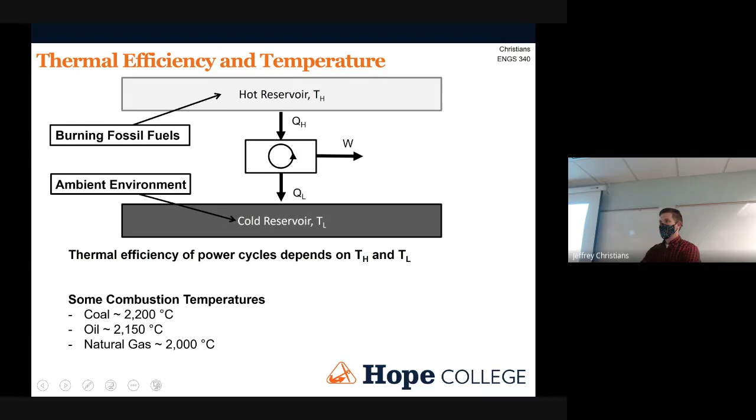When we looked at some of the practical aspects of a power cycle, like the steam cycle, we said, well, okay, so what do we know from the stuff that we've done? A higher high temperature and a lower low temperature are better. So we want to ideally get the highest high temperature that we can and the lowest low temperature that we can. So we design different things like cooling towers, or we put our power plant by a lake or a river, or Lake Michigan, something like that, to get our low temperature consistently low.

But we can't go below ambient temperatures, whatever that happens to be. And then for the high temperature, we're limited in steam power plants—limited by the practical aspects of a steam plant, in that you're making really high temperature and really high pressure things, and that's just inherently dangerous. So we're limited by kind of materials aspects and just the inherent danger of continuing to raise temperature and pressure.

But we still have a lot of temperature to play with, and that's where the Brayton cycle comes in. It's the standard air cycle for power generation, the natural gas power plant cycle. It allows us to start to access higher temperatures. Like natural gas, the combustion temperature is 2,000 degrees. We want to get up closer to that, out of this 500 to 600 degree C range, and bump up over 1,000, 1,500 type degrees. Raise that high temperature as much as we can.

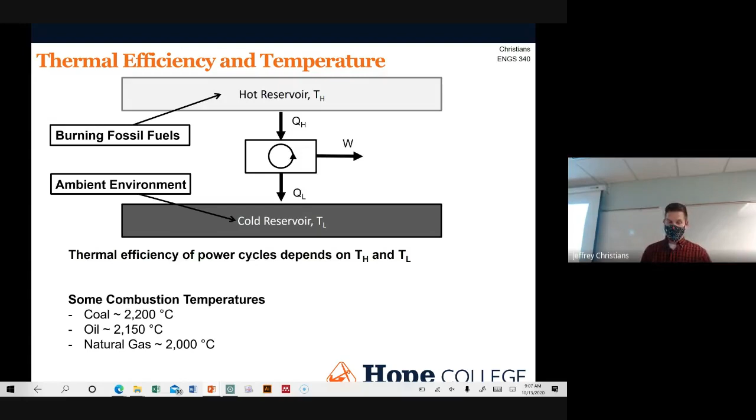So what that means is we can take a system like this - instead of just a natural gas power plant running just a Brayton cycle, we're going to combine the Brayton cycle with a steam power plant cycle, with a Rankine-like cycle. We're going to combine these two so that we can use the really high temperatures, but we can also use the medium temperatures.

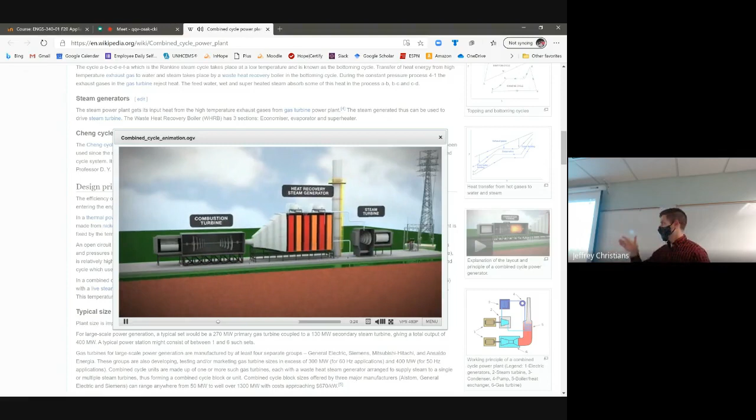I showed this last week, where modern natural gas power plants have a setup at least generally like this. This is what the Holland power plant looks like, where all the way on the left is the combustion turbine. It's really a compressor, combustion chamber, and turbine all in one. Then you have a boiler - that's the really tall structure they call the heat recovery steam generator. That's simply the boiler.

That combustion turbine is generating electricity. The waste heat from that turbine goes as the heat source, QH, for the boiler, for a second system running a Rankine cycle. So it's a way to be able to use a broader range of temperatures in our system.

It boosts our practical efficiency. In practical terms, a Rankine cycle by itself, we're stuck at about 40% thermal efficiency. A combustion turbine by itself, we're also stuck at about 40% efficiency. If we put these two together into a combined cycle like this, we can get up to about 60%, actually a little above 60%. So practically, for the same amount of fuel, we get 50% more energy.

So it's a huge bonus - 50% more energy for essentially free. I mean, you have to build extra stuff and there's some costs with that, but essentially we get 50% more electricity for no extra fuel costs.

That's why if you're building a natural gas plant, you're going to be building a combined cycle plant. The only places that systems are built that are not combined cycle plants are for what they call peaking power plants. The power demand over time goes up and down - as people come home, everybody turns on lights and washing machines and dishwashers and air conditioners, and power demand goes up. So to meet some of those spikes, sometimes they'll have just a system that operates just for that - sometimes they're called peaking plants.

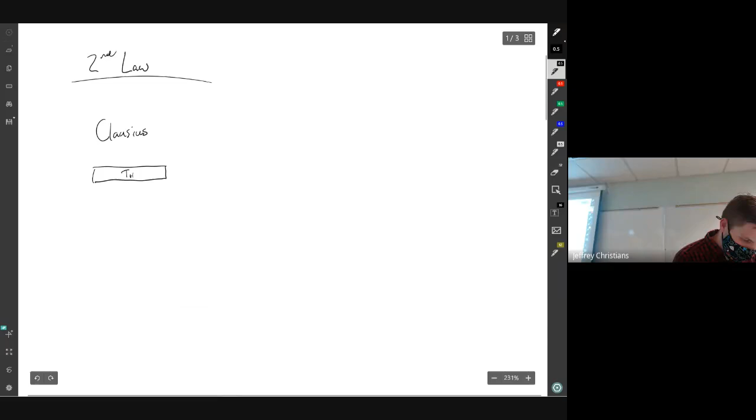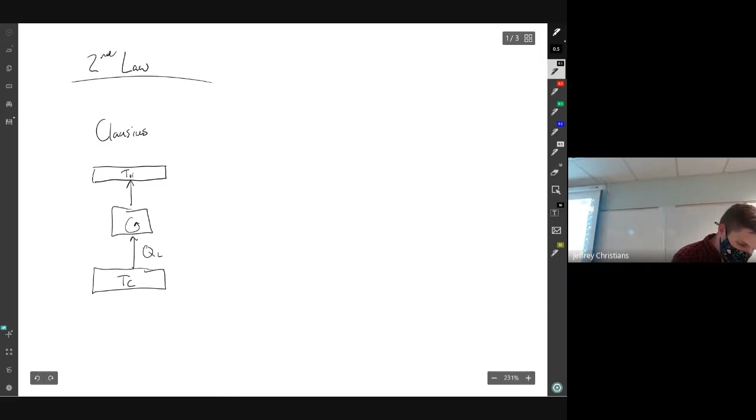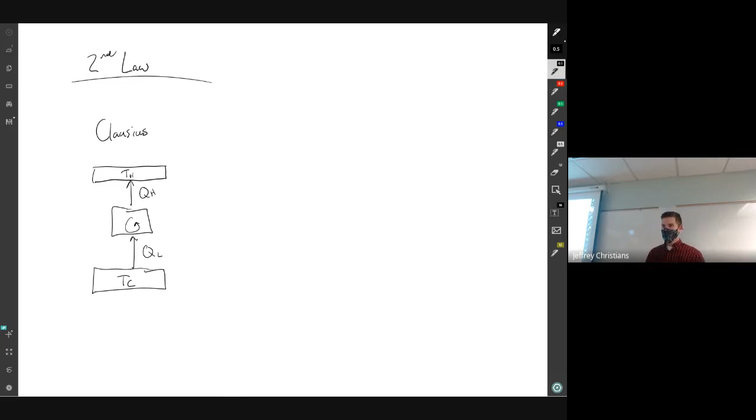This is QL, QH. We said Clausius said that we can't take heat and move it from a cold temperature up to a high temperature without any work input. And the other statement of the second law that we had was Kelvin Planck.

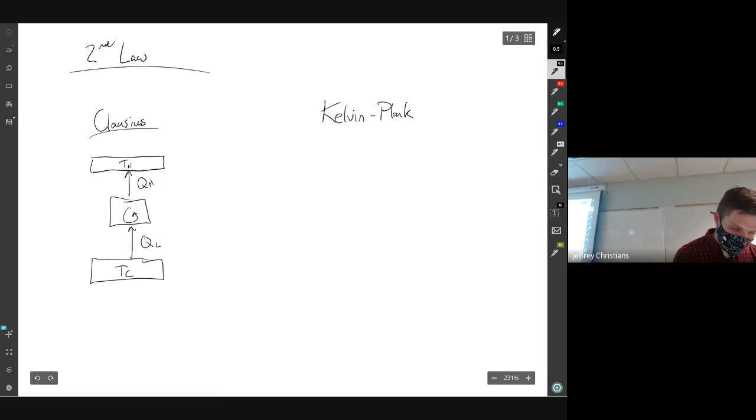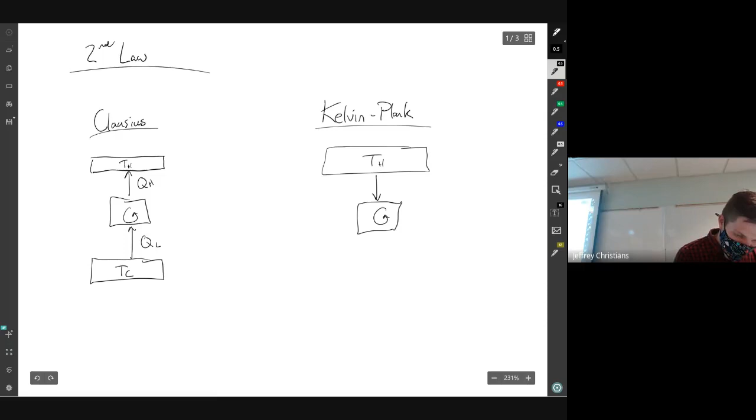Kelvin Planck said kind of the opposite. Kelvin Planck said that we couldn't take heat from some high temperature reservoir and turn it perfectly into work. So the 2 kind of tweaks that we could make on that was...

I'm going to draw this here in blue. So these are the 2 different statements of the second law, Kelvin Planck and Clausius. What we said is we could do something like this, where we added work into a system, and then using that work, we moved heat from a cold temperature to a high temperature. And for Kelvin Planck, we could take heat, convert some of it to work, and then lose or waste the rest.

TL. So what I've drawn in blue now are the 2 cycles that we can actually do. In black are the 2 different statements of the second law. Now in blue, that's what we can do. We've focused so far only on the right-hand side, taking heat, turning it into work.

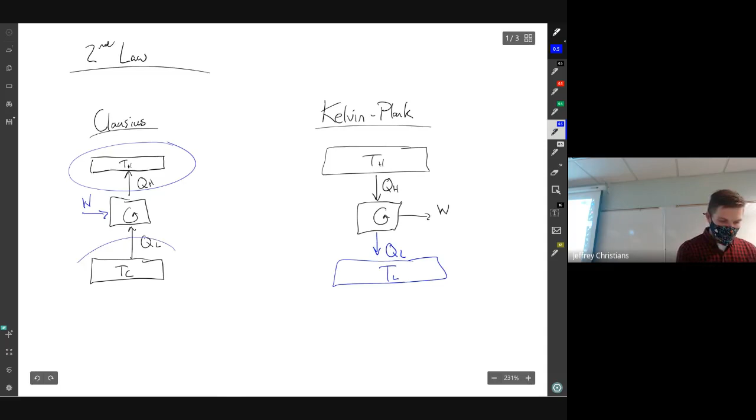That's what's happening right up here at the top. That's outside. And down here at the bottom, that would be the inside of your house.

What's kind of cool about it is, for Kelvin Planck, we said, what's in that black box? And that's what we focused a lot on. What is in that black box? The ideal thing on the right-hand side in that black box is what? What's the best black box we could have? Carnot, the Carnot cycle. So what's the best black box we can have on the left-hand side, which is the same thing but going the other direction? Everything's going the other direction. Take the Carnot and reverse it. Draw the arrows the other way. So that's exactly what we're going to do on the left-hand side.

And we can make a reverse Carnot called the Carnot refrigeration cycle. It's literally taking the Carnot cycle and flipping all of our arrows the other way. What was once a pump now becomes a turbine. What was once a turbine now becomes a pump. Everything just flips and reverses and does the opposite of what it was doing before. So what was once the condenser now becomes a boiler, and what was once the boiler now becomes a condenser. Everything flips roles.

And when we flip roles like that, we get to an ideal refrigeration cycle. What do you think might be a problem with it? All of the same things that were problems with the ideal power generation cycle. So like the Rankine cycle, we can make practical concessions. It's not easy to design a compressor that deals with vapor or liquid mixtures. Same thing for the refrigeration cycle. So we're going to do the same kinds of things and ask, practically, what can we actually do?

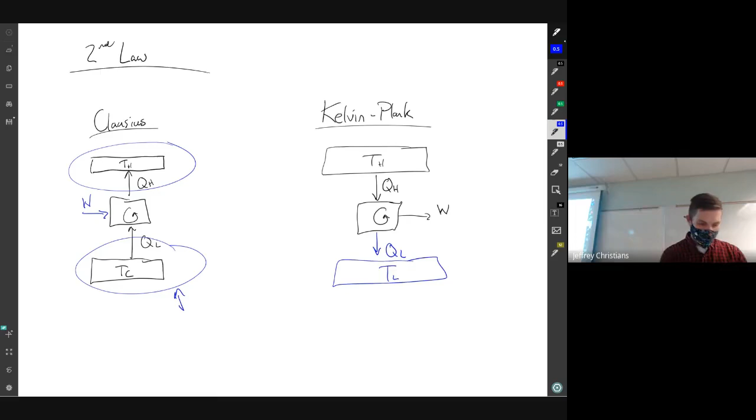In an AC unit, that cold temperature is your house and the warm temperature is outside. In a heat pump, you do the exact same thing, but now the warm temperature is your house and the cold temperature is outside. So it's a way to flip an AC unit and turn it into a place where you're dumping heat into your house.

The reason you would do that versus a furnace or an electric heater is you actually get more bang for your buck. You're not creating heat. Like an electric heater, you're taking electricity and converting it to heat. In a refrigeration unit, you're not creating heat, you're moving it from one place to another. So you can actually move heat easier than you can create it.

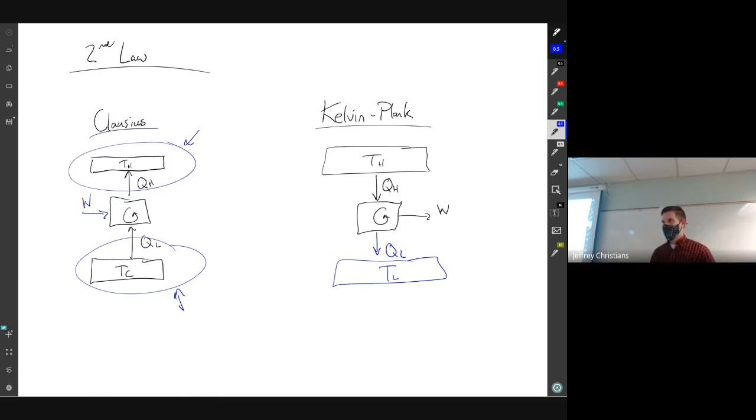So heat pumps, refrigeration cycles, they're not 100% efficient — they can be 200 or 300% efficient, or even more. So you get a whole bunch of extra heat for the amount of work you're putting in. We'll go through and do some analysis of that in the videos and also on the homework.

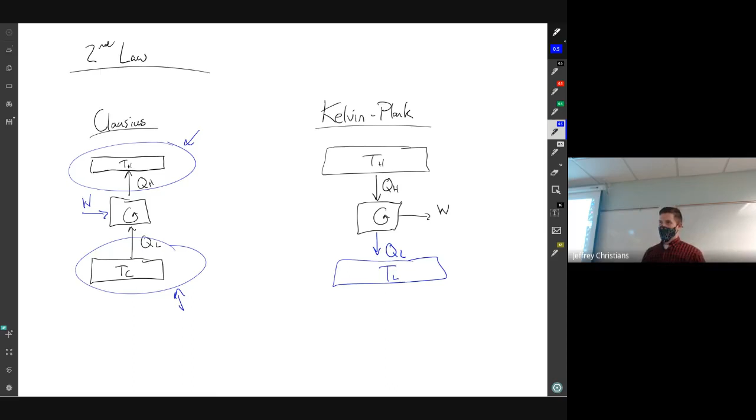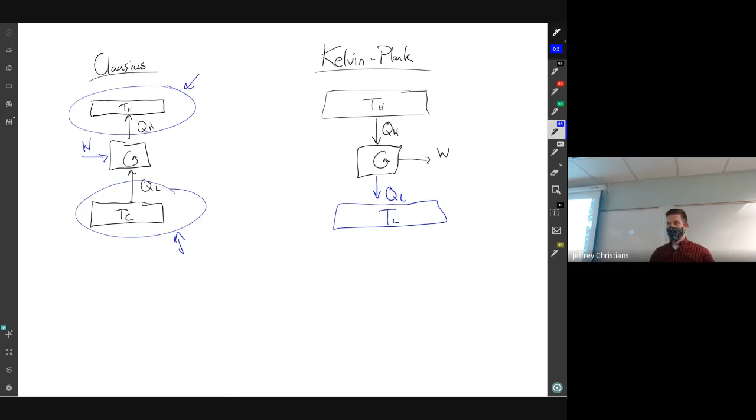But what we're going to spend the rest of today looking at is neither of those. We're going to again start transitioning to a little bit more theory, but hopefully stay connected to real tangible things. And we're going to do that by switching the types of systems we're looking at. So far, we have looked exclusively at systems that are control volumes.

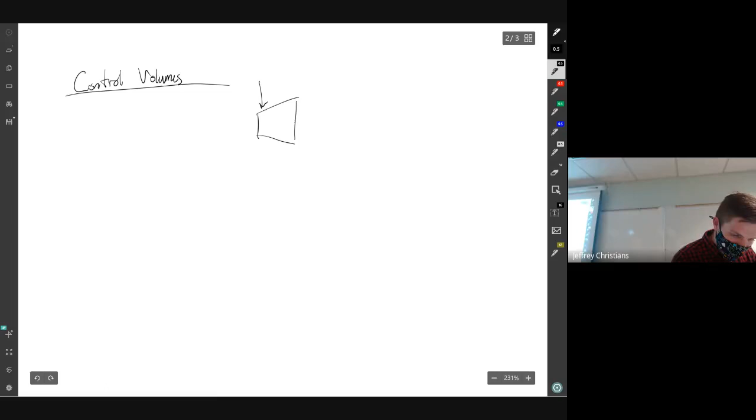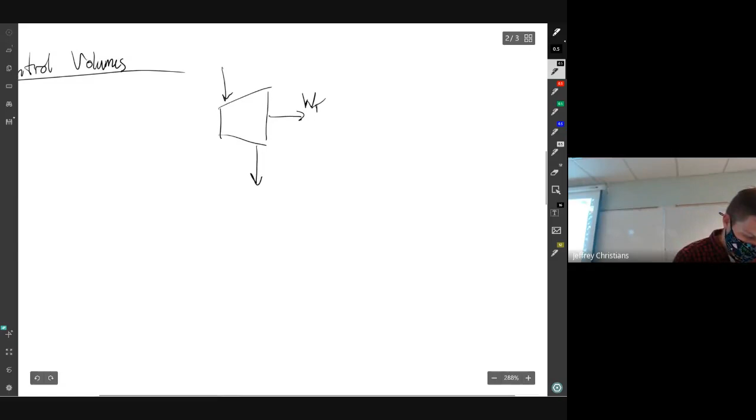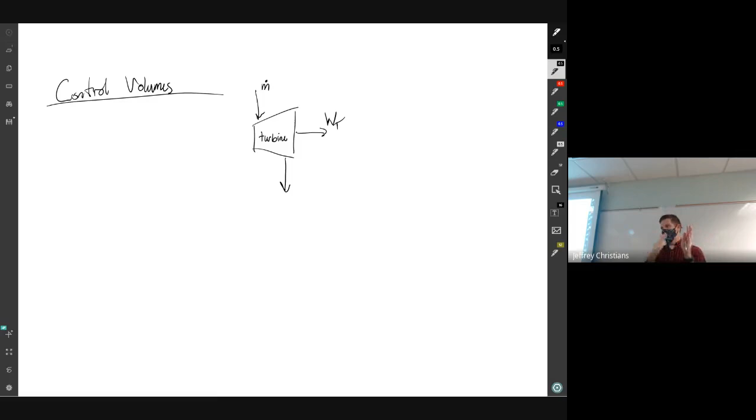What I mean by that, I'll just draw one. We have a system like this, we're getting work out — so this would be a turbine. And we're looking at a mass flow rate through that thing. If we think about how we're doing the analysis, functionally we're taking a look at that specific region of space and saying what comes in and what is leaving. So in a system like this, work is generated, or extracted, or supplied, by an external device.

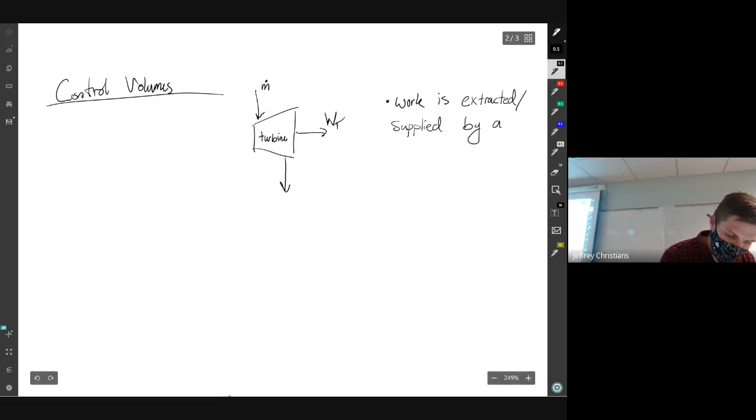Right, external device - a pump, a turbine, a compressor, one of these things we've been looking at before. These are commonly used all over the place. In real systems, we have pumps, compressors, and turbines. But it's helpful, especially if we want to understand a little bit more fundamentally what some of these different thermodynamic quantities are and where they come from.

It's useful to shift our perspective a little bit. Instead of looking at a specific region of space, we can follow a set amount of stuff, and watch what happens to this specific mass. We do that using a control mass - instead of viewing a region of space where things come in and go out, now we view a specific amount of stuff and look at changes that happen to that quantity. The big difference is it allows us to understand a little bit better what some of these quantities are.

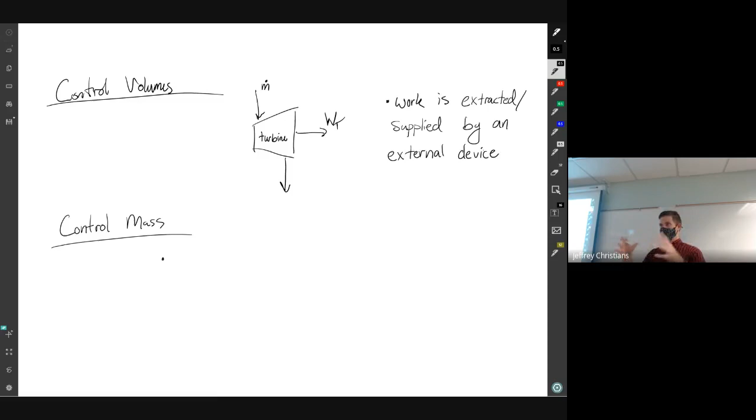The big difference is that work becomes - in a control volume, work was happening because of some moving mechanical part. It's kind of the same, but now it's not a moving system - the whole mass is either expanding or contracting. In a control mass, we're looking at a set amount of stuff, so if the pressure goes down, the whole thing expands. Volume can change - we're not looking at a set region, we're looking at a set quantity, so it can expand and contract, and that's where work is done.

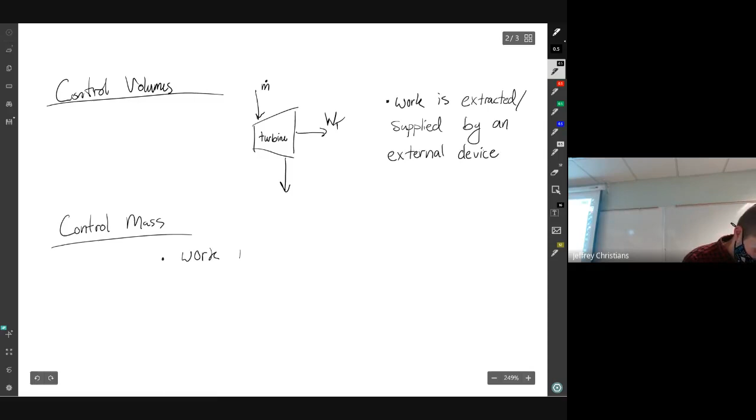So work is done by the system - and by system, I mean this control mass, this thing that we're looking at - by the system pushing against the surroundings.

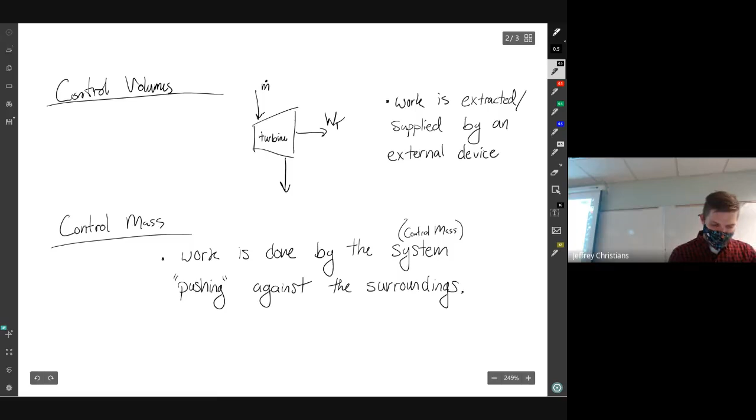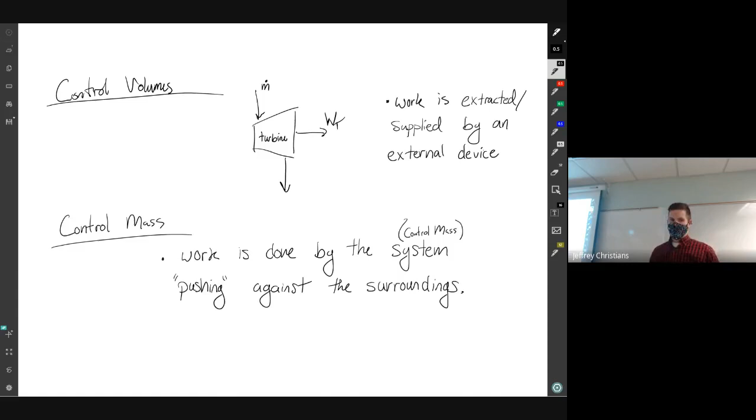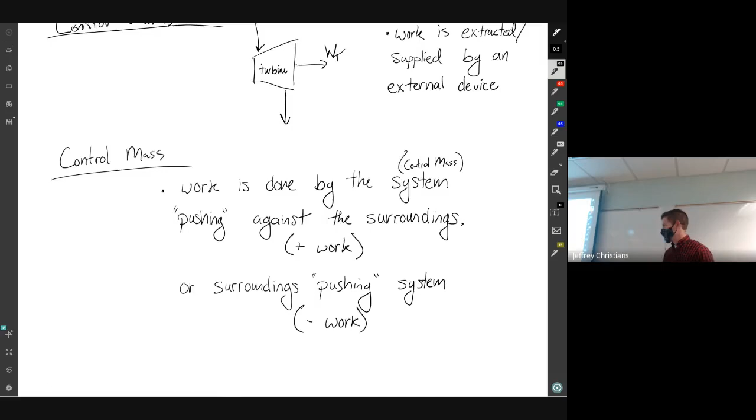Or we could flip that and say the surroundings can push against the system. So this is how we're going to define it. How did we define positive and negative work before? We defined it kind of by a steam engine. If we put heat in, that was positive heat. If we take heat out, that's negative heat. If we put work in, that was negative work. If we take work out, that's positive work. So if the system is pushing against the surroundings, that would be positive work. Or the surroundings pushing on our system, that would be negative work.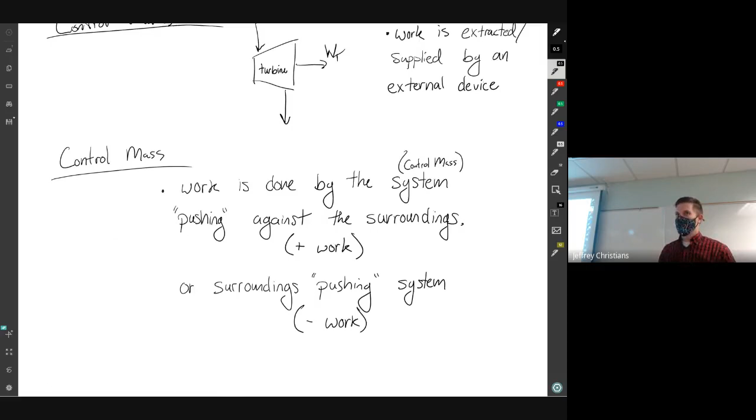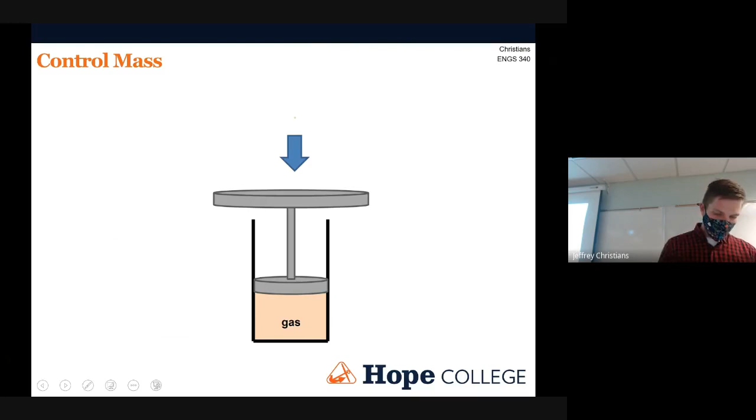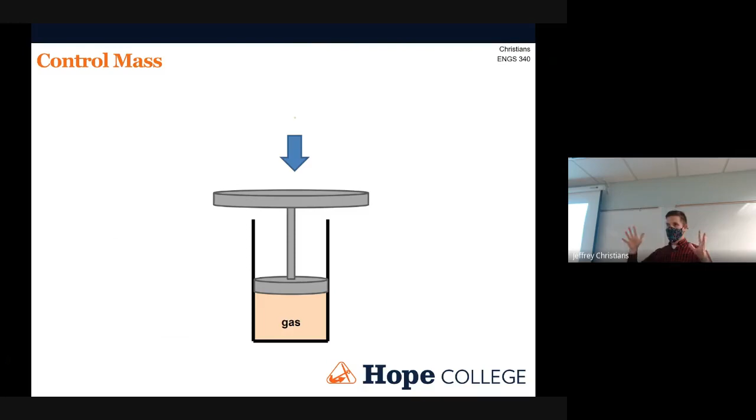So we have the same definition, but it feels a little bit different - where if we're pushing against the surroundings, that's positive, that's getting work out. If we're pushing on the system, we're putting work into the system, that would be negative. You may remember from quite some time ago when we first talked about reversible processes, I showed something like this - what was a reversible compression? It was a compression that happened as gradually as possible, where our system stays in equilibrium the entire time. We're adding a single grain of sand on top of our piston, grain by grain, and slowly that's compressing our gas.

This is a control mass problem, so we're looking specifically at the gas in that cylinder. Oh, didn't mean to do that - I think I must have pushed a button on my pen. All right, are we back? We're not back yet.

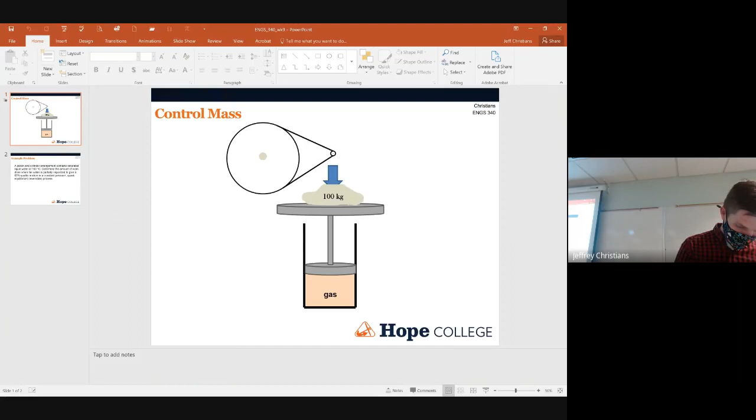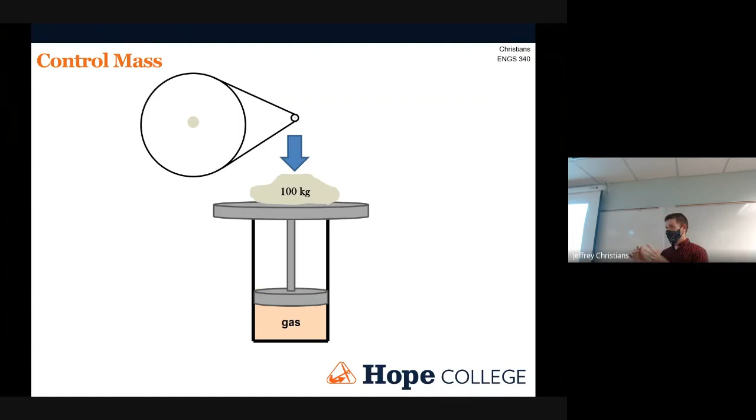All right, so this is a control mass problem where we're looking at the gas inside of the cylinder. That would be the region of space that we're interested in, and it can change volume as it's expanded or contracted - that's where either work is done on the system, or the system, the gas, does work on the surroundings. You can see this is going to be a piston and cylinder. We're going to do a lot of piston and cylinder problems because it's an easy way to conceptualize what a control mass is - the control mass is the stuff inside the piston and cylinder.

That's certainly not the only way control mass problems are relevant. We're going to use them to look at something like an internal combustion engine - if we want to calculate the power from an internal combustion engine, we can use control masses to do that. But they're useful more broadly than that. We'll use this as a useful way to picture it because it's easy to see what's the mass we're looking at and what's the surroundings. So we'll use piston and cylinder problems quite a lot.

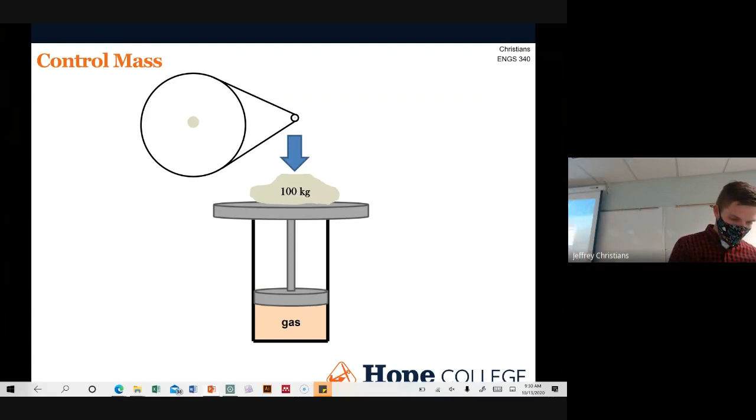Okay, so for this system, this type of control mass, for work to be done - we'll put a star by this.

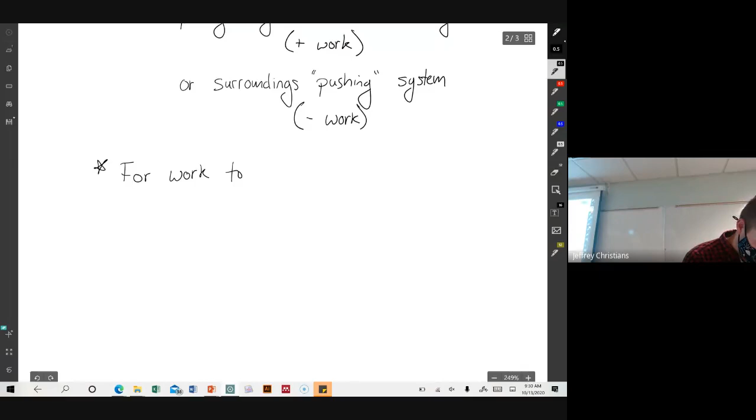For work to happen, either positive or negative work, anything non-zero, there must be a volume change.

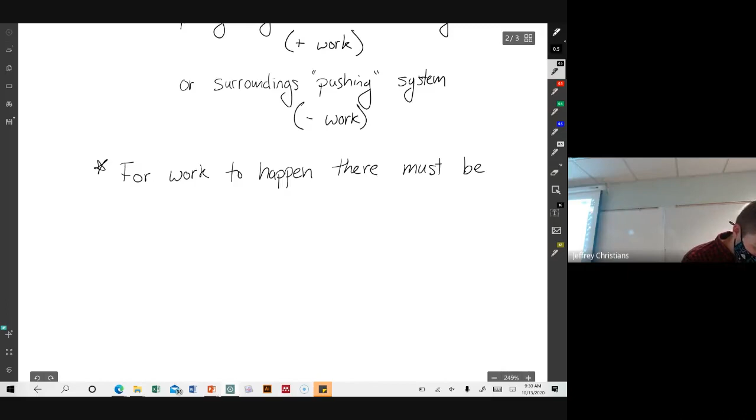So this is one of the key insights from control masses. We have to have a change in the volume of the stuff for there to be any work at all. If there's no expansion, if there's no contraction, there is no work. If it's a constant volume process, work is zero. You can't, there's no pushing. The surroundings are not pushing on the system, the system is not pushing on the surroundings if the volume isn't changing, if there's not an expansion and contraction.

If we think about a more basic definition of work, work is a force applied over a distance. So no volume change means there's no distance. If I push against this, but it doesn't move, I maybe pushed hard, but I didn't actually do any work. So the same thing here. There's no work if there's not a volume change.

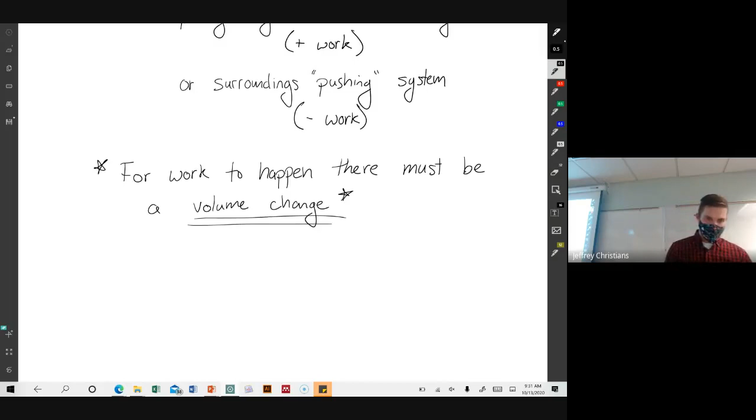Just like in a control volume, we can have different ways that we go about it. I just showed you one where we did a reversible compression, or pretty close to reversible compression, where we added a grain of sand at a time. We could also do, you probably don't remember this, but there was another example. What's an irreversible one where we throw a 100-kilogram barbell on it? And we don't do this one grain of sand at a time. We do it all of a sudden. That would be an irreversible process.

Just like for a control volume thing, we could have a reversible turbine or an irreversible turbine. We can do the same thing with control mass problems. We can have a reversible or irreversible expansion or compression.

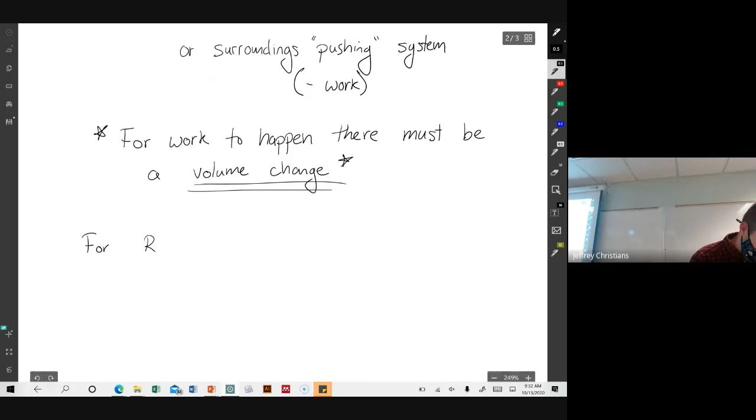For reversible work, we call this typically PV work. This is PV standing for pressure volume work.

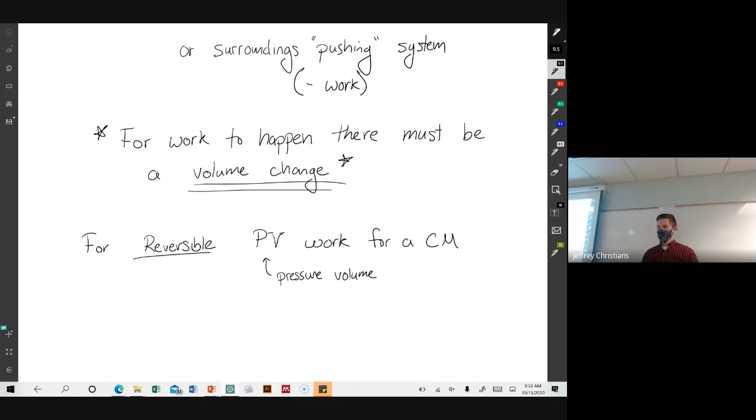So for reversible PV work for a control mass, okay, so for a control volume, we said we could do delta S equals 0, and then we could do energy balances. That still works. We're still going to be able to do the same thing. The other way that we did it, we did this for liquids. We said we can just calculate the work directly from pressure and volume. And we got the integral of V delta P, VdP. So we got for an incompressible liquid where V doesn't change, we had, let me just write this.

Equals minus the integral of VdP. I'm going to put this in brackets so that this is just a note. This isn't, it's going to look kind of like this, but not exactly.

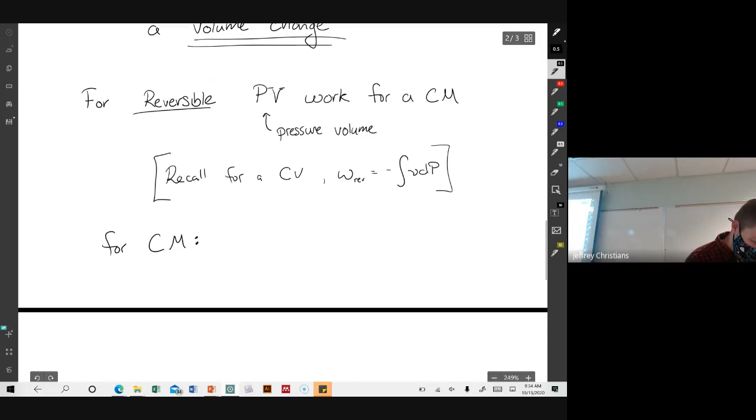For a control mass, the reversible work, and well, I'm going to write it like this. I'm going to put little subscripts 1 and 2, 1 on the left side, 2 on the right side. I'll explain why I did that in a second. It's equal to minus the integral of PdV. I think I screwed up. It shouldn't be minus. It should be just the integral of PdV. So it looks almost the same, but the P and the V are switched.

And that's with reason, but it's really easy to get those two mixed up. The reason that they're switched, we can get into it a little bit, but we'll get into it later. And just trust me now that they're switched and they're supposed to be switched. It's because of enthalpy. Enthalpy screws everything up, right? Because it had this flow work, which was a pressure volume term in it. So that flow work term screws up other stuff.

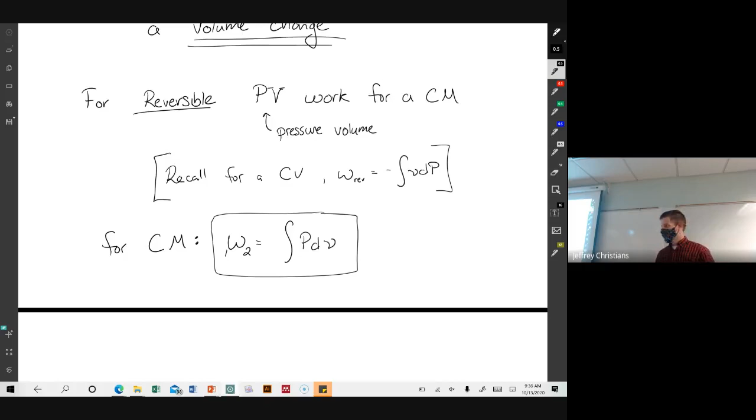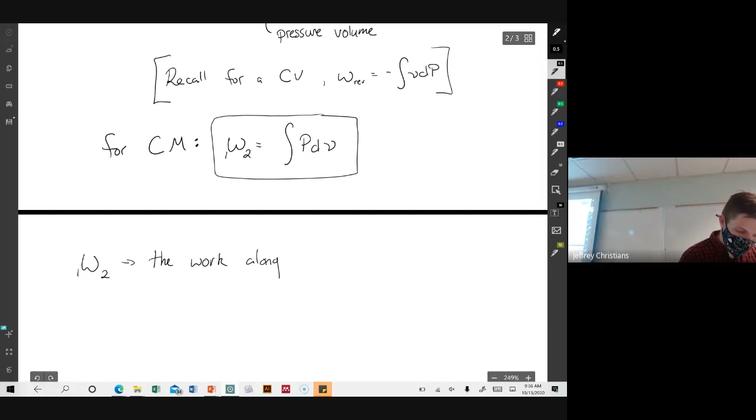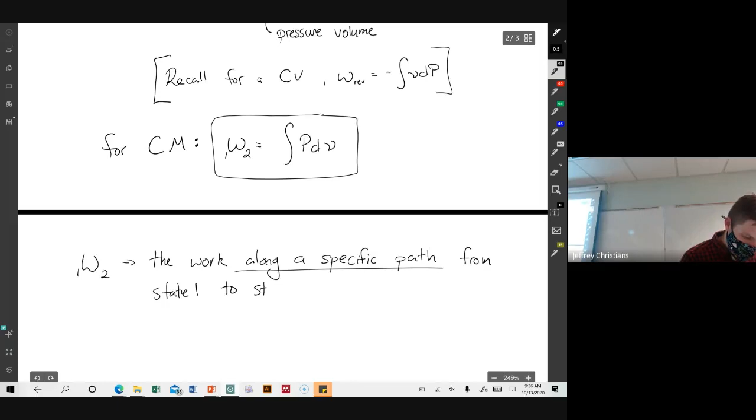So this is a key equation for control mass problems. It's the work for an expansion or contraction. The W12 means the work along a specified path, or a specific path, from state 1 to state 2.

So we're trying to connect this to stuff we've already done and gotten really good at. When we looked at the work of a turbine, we said we're coming in at state 1, the turbine happens, and then we leave at state 2. This is kind of the same thing, except it's not like coming in, something happens, and then we're leaving. It's initially we're here, something happens, and now we're here. So it's not like a space thing with an inlet and outlet.

That's the big difference for a control mass, because we're tracking the same bit of stuff throughout. So we look at where it is initially, what exactly happens, what is that process, and then where we are after that.

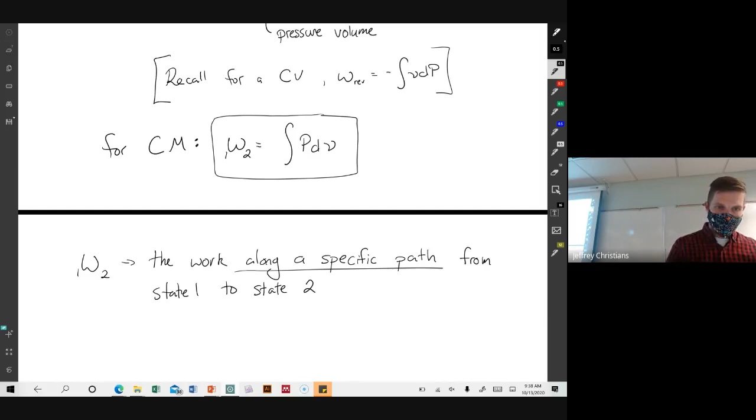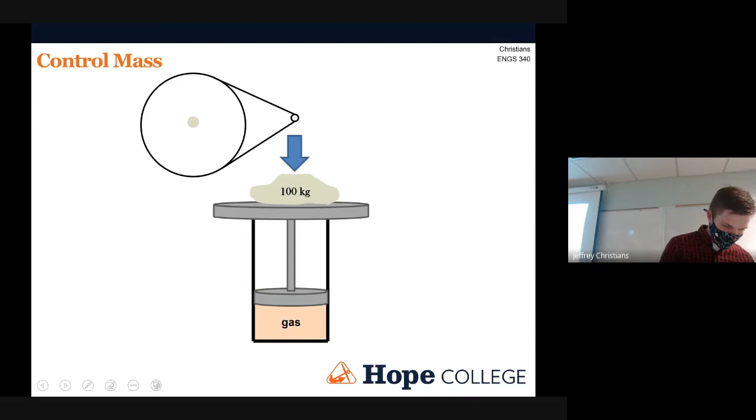Okay, we'll do one quick example. You'll see some similar examples in this week's homework, a couple of them, and once you get the hang of them they're really easy. In this example, we have a piston and a cylinder. We're going to deal with piston cylinder problems quite a bit because it's relatively easy conceptually.

It contains saturated liquid water at 100 Celsius, so it's 100% liquid. Then we have to do work to partially vaporize the system to give a 65% quality mixture. We're told this happens through a constant pressure, quasi-equilibrium, or reversible process.

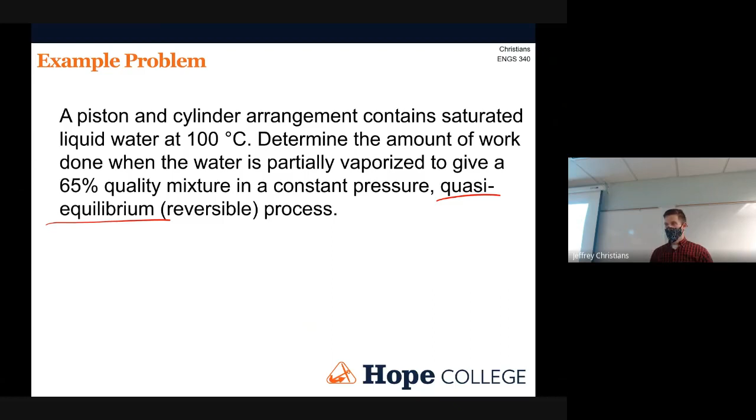Quasi-equilibrium means this is one of those really slow, gradual processes where all the forces in the system are balanced. It's just another code word for equilibrium, or a code word for reversible. So when you see quasi-equilibrium, this just means reversible.

Okay, so let's draw out the process of what's happening here. In our example, we had an initial state, which I'll call state 1. This is my piston cylinder, so there's my cylinder and a piston.

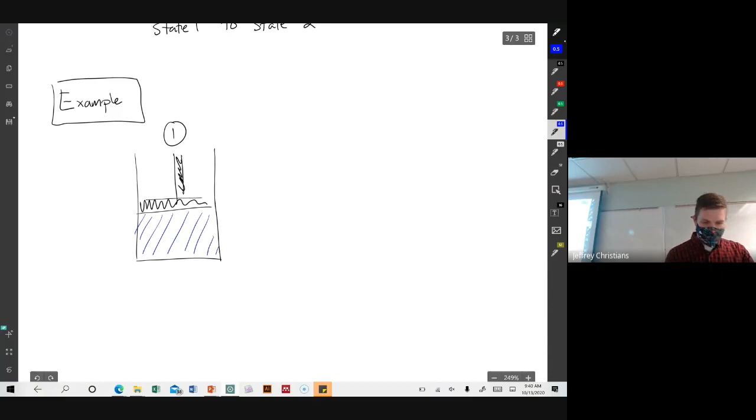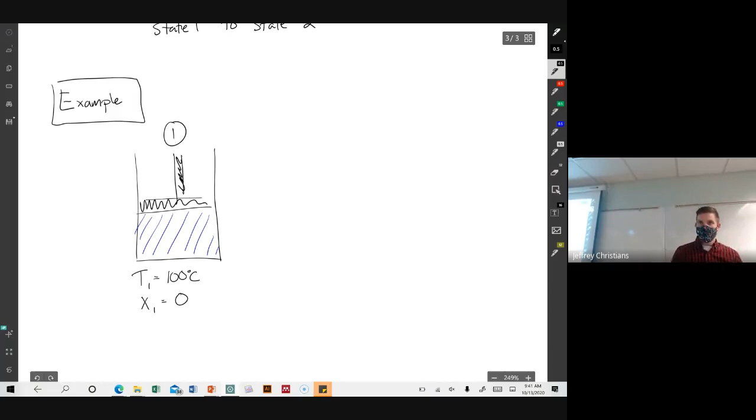And this was filled with entirely liquid water. Initially it tells us our temperature is 100 Celsius and that it's saturated. So X1, it's a saturated liquid, 100% liquid, right at the boiling point. So X1 is 0.

And we're told what kind of process it is: a quasi-equilibrium or reversible process, also a constant pressure process. So we have a constant pressure, P1 equals P2, and this is reversible. We're going from that initial state to our final state, or our second state.

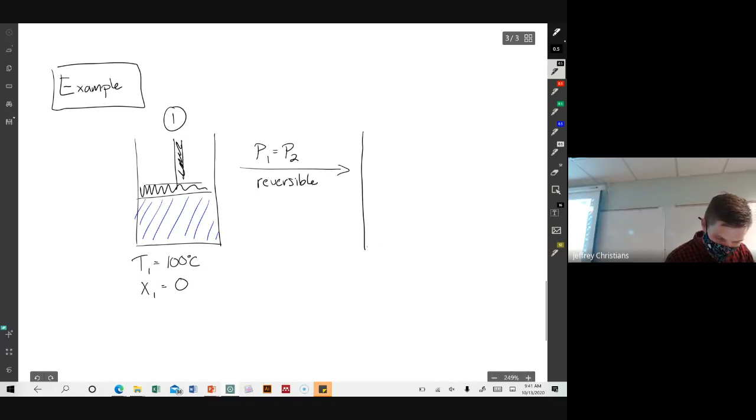We've gone through an expansion, so there's our piston and cylinder. Caution, things are not drawn to scale, but at least these sketches give us an idea of what's happening. And our final state, I'm forgetting from our picture here, our final state was constant pressure and 65% quality.

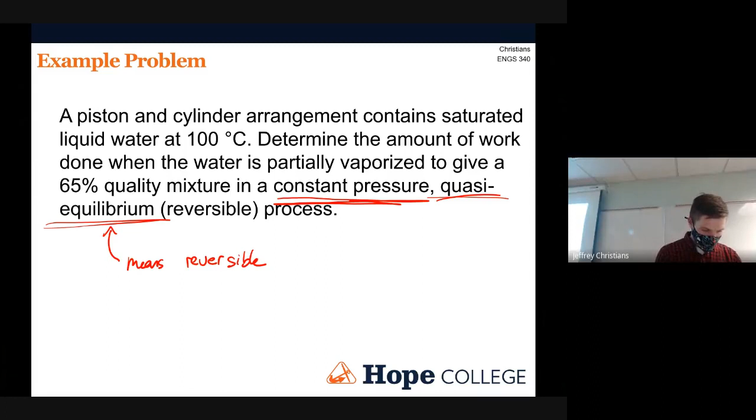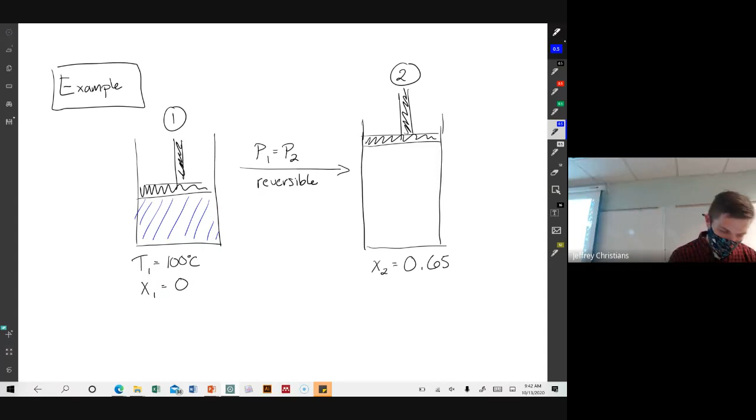So this is our final state 2. We're told that X2 equals 0.65. So if we think about what that means, 65% by mass is vapor. That means we've gone from this to now having liquid and vapor.

Again, not drawn to scale. If I were to draw this to scale, the liquid would be a tiny little puddle and the vapor would be huge. But at least it gives a ballpark idea of what's happening.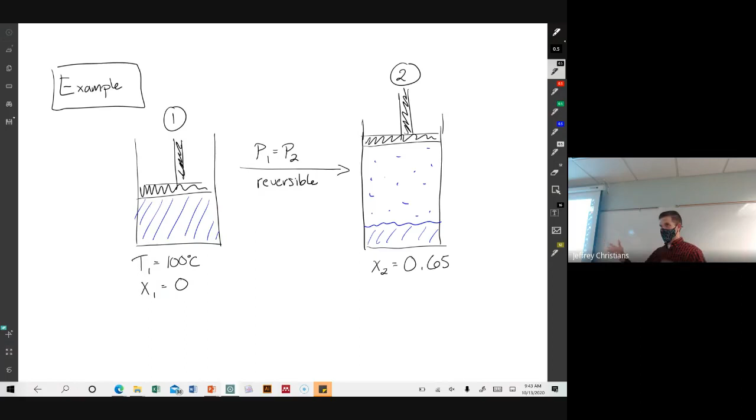Okay, so if we look at trying to solve this problem and figure out how much work we got out of the system, this is an expansion problem. Our system, the liquid, is expanding and pushing against the surroundings. So that's a system where we're getting work out, a positive work system.

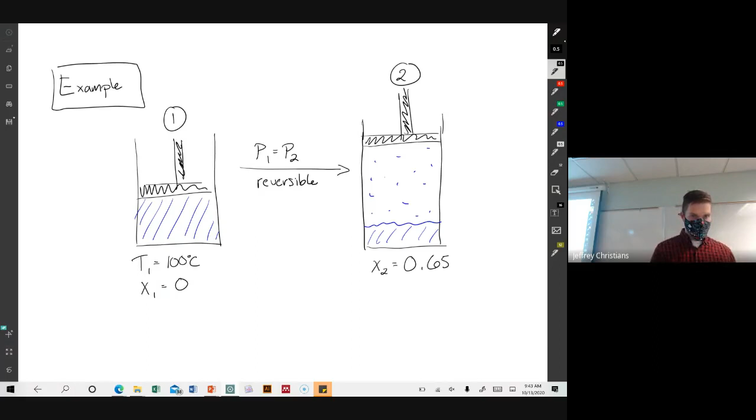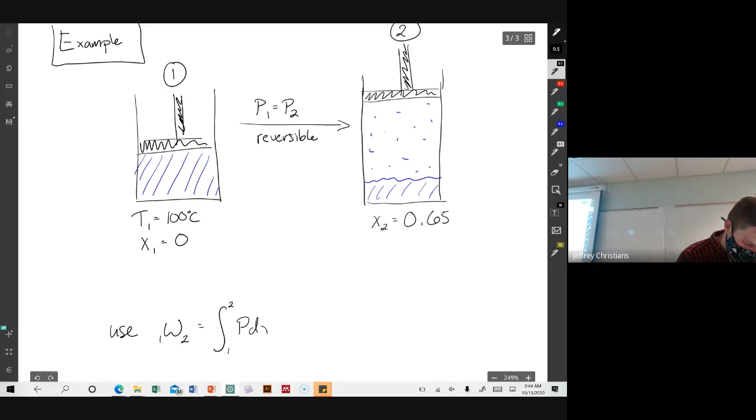And if we look at calculating that, we're going to use W12 equals the integral from state 1 to state 2 of P d specific volume.

Okay, so we have to figure out, like we've done in control volume problems, we can use some of the things we know about the state. We can look up specific volume, entropy, enthalpy, and internal energy, whatever we need. Same thing at state 2, we could look up things we need. So we know if we wanted to look up the pressure here at state 1, it's 101.3 kPa.

We could also look up the specific volume. Specific volume is 0.001044 meters cubed per kilogram. So we know two things, we can look up the rest.

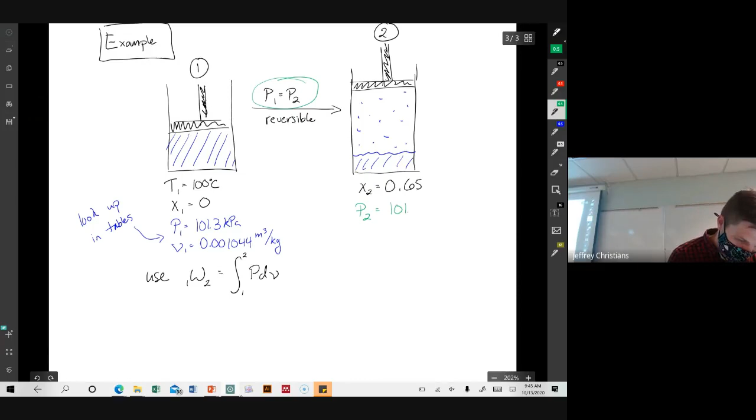If we know those two things, we do know from our process that P1 equals P2. So we can say that P2 equals 101.3 kPa.

And we could look up our specific volume. Now, in this case, we would have to use V2 equals Vf plus X2 Vfg because we have quality. So we'd have to go through and do that calculation.

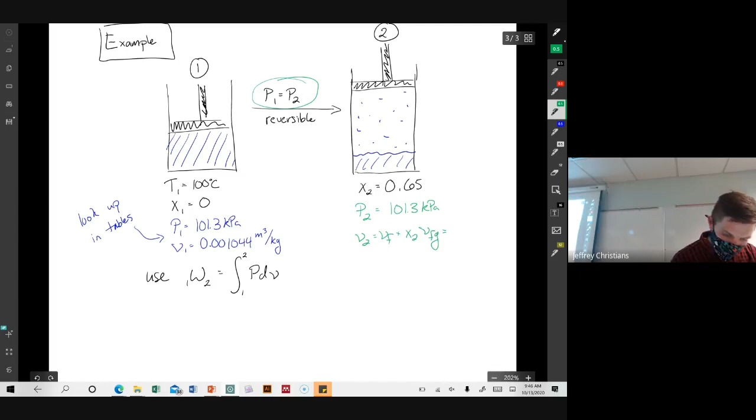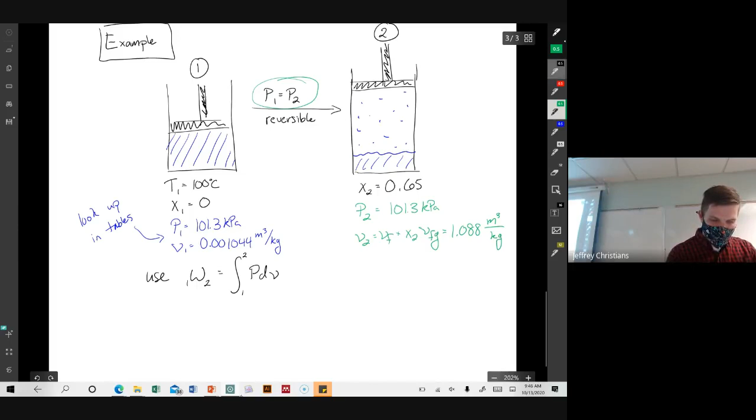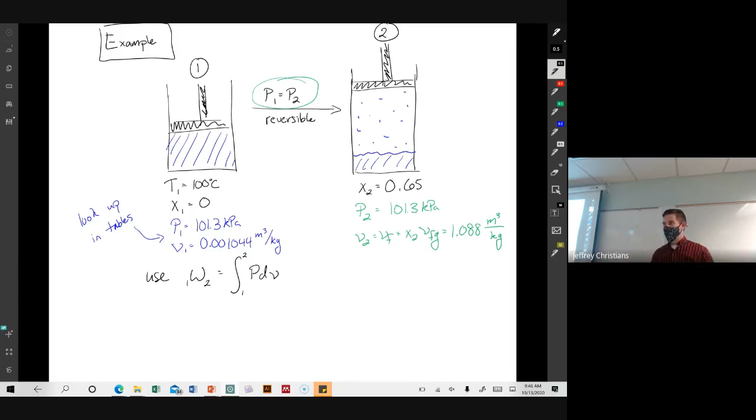If we did that, we would find that the specific volume is 1.088 meters cubed per kilogram. And now you can definitely see my poor drawing skills because I drew it like expanding maybe a factor of 2, when in reality we expanded a factor of 1,000. Vapors take up a lot more space than liquids, especially at low pressure. So in reality, we expanded a factor of 1,000. I drew it about a factor of 2 because caution, things are not to scale.

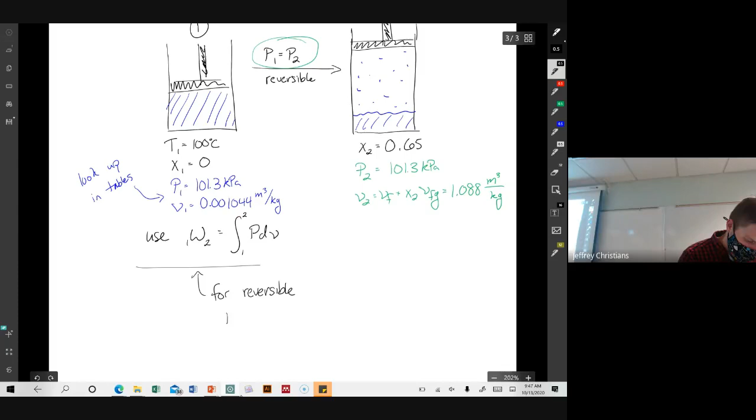If we want to do this, and we're almost done here because these problems are quite simple, we can use this for a reversible process. This happens to be a reversible process, so that means we can use it.

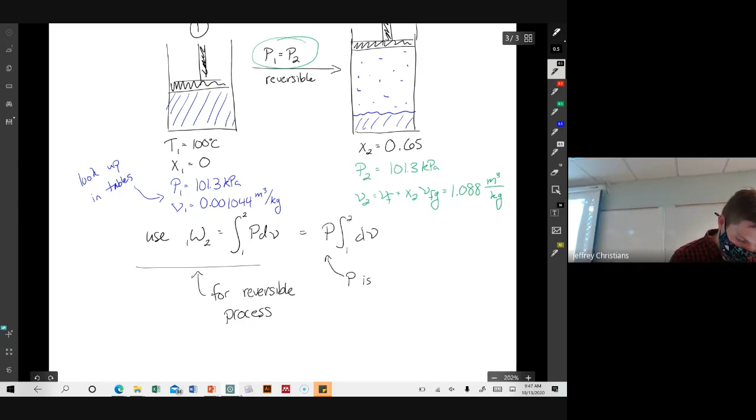The handy thing is that our pressure happens to be constant. So this equals P times the integral from 1 to 2 of dV, because P is constant here. So because of the specific way that we're doing this, this is a constant pressure system, so we can take pressure out of the integral.

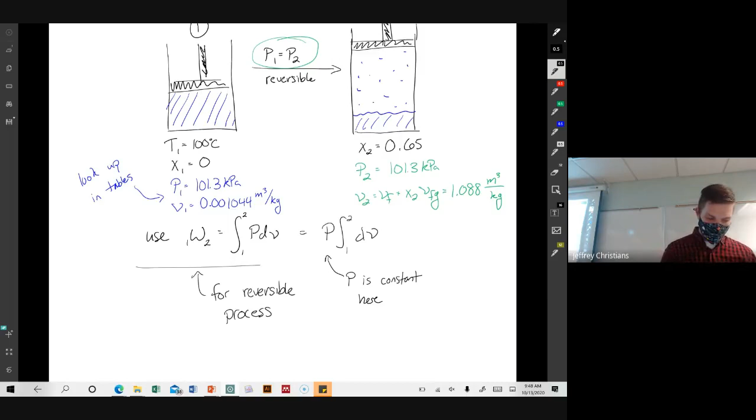And we can solve this integral. This is equal to P times delta specific volume. And we can go down and solve this, that the work from state 1 to state 2 equals pressure times delta specific volume. Instead of out minus in, it's final minus initial, V2 minus V1. And we can plug numbers into that.

That's 101.3 kPa times 1.088 minus 0.001. And that has units of, sorry, I'm running out of space, let me move this over a little bit. That is units of meters cubed per kilogram.

So now the only thing that we need to do is plug in those numbers and do some basic unit conversions. These units here are: kilopascal is a kilojoule per meter cubed. So you can see functionally the meters cubed would cancel with that meters cubed.

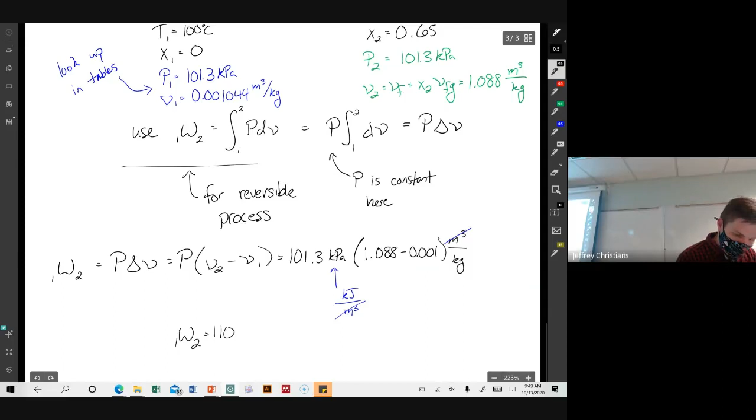So we would get that the work from 1 to 2 is about 110 kilojoules per kilogram. And if we knew how much mass we had, if we had, say, a kilogram, we could know exactly how much work it took, how many kilojoules.

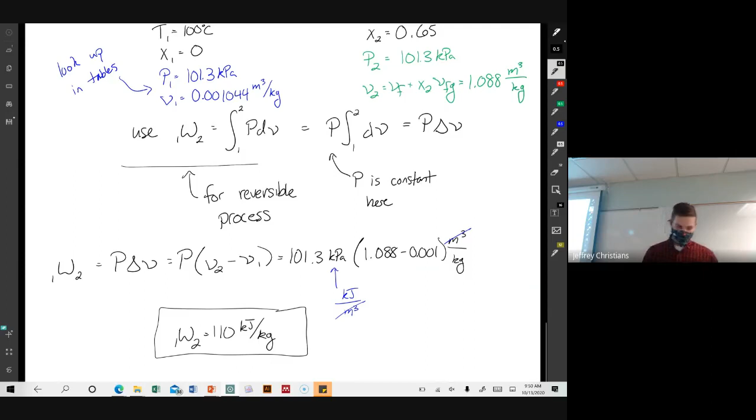So we're going to stop there for today. This equation works regardless of the path, so long as that path is reversible. We'll talk later about what to do if the path is not reversible. But we can go constant pressure, or a varying pressure if pressure is changing. How does that work? We'll go through a couple different examples of different paths that you can take.